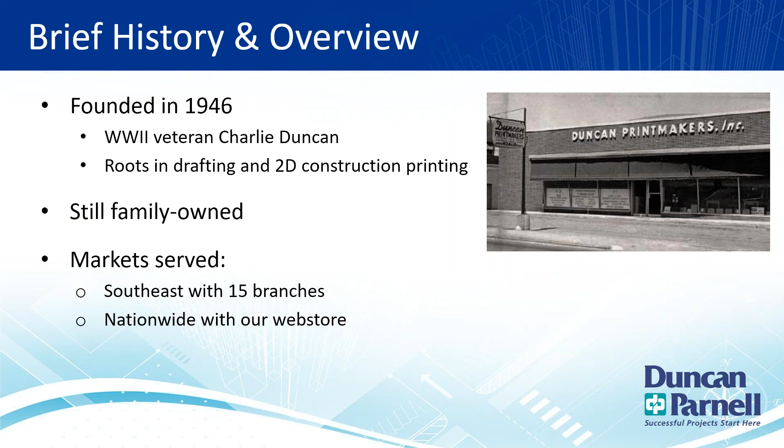Let me get my slideshow going. A brief overview of Duncan-Parnell, who we are and what we do. We were founded back in 1946 by Charlie Duncan after World War II. Started off as a printing company, still a family-owned company. Mark Duncan is the president now, he's third generation. We pretty much cover the whole Southeast along the Atlantic coast from Florida, Georgia, South Carolina, North Carolina, and Virginia for survey products, and we have 15 different stores, also nationwide with our web store.

A few of the things we do, of course you guys are aware of our geospatial solutions or you wouldn't be here at this webinar. We are the Trimble dealer for those states I just mentioned in the geospatial arena, and we also sell, rent, train, and have full service centers to work on all your equipment. Some things you might not know about our company: we do have a big signs and graphics solution center. We can do construction, interior, exterior, ADA, any of that - big signs for construction sites, fence wrap, graphics around buildings. And when we're turnkey, we do everything from consultation all the way to installation, so we can help you out with any of your signs and graphics needs there.

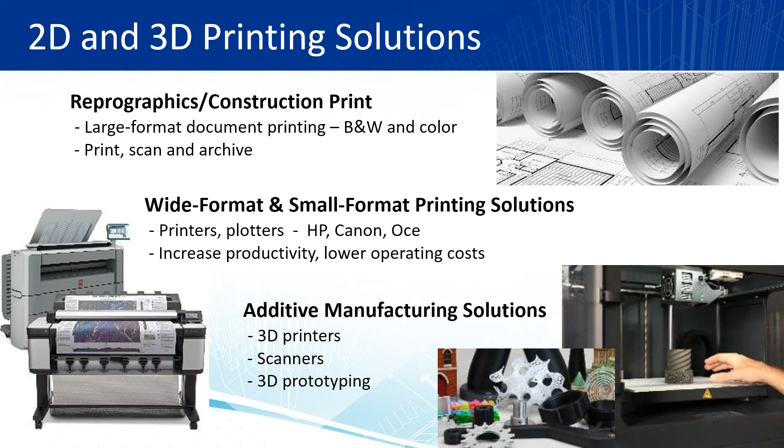We still do reprographics and construction prints. In our 15 offices, we still have a lot of walk-in business and people we do printing for. We also can scan and archive any old documents that you have. We do sell wide format and small format printing solutions, partnered up with HP, Canon, and Oce. And we also have a big additive manufacturing solutions division, which is just a long word for 3D printing. We sell 3D printers, we sell scanners that go along with 3D printers, and we can also scan things that you want prototyped - we have a division that specializes in prototyping there, so we do have that as well.

So a few of the things we're going to cover today: we'll start off with Trimble Access 2020. It came out just a couple weeks ago, and it's now available on Android, so we'll cover how that works. They added a Snap to toolbar in the map screen - Snap to is hard to say, so I'll probably just call it the Snap toolbar - but they added that. They also added a limit box if you're doing SX10 stuff using point clouds. They now support polylines, and you can also stake a slope distance along the line.

That's new. There's also a new feature for measuring points with independent sets of satellites, and you can change your precision display on the data collector. We're going to take a look at all of those in Trimble Access just to show you guys where those things are. Then also, in TBC, we've added a CAD Command Line in version 5.3, and also a feature to flatten surfaces - if you have some outliers on your surfaces, you can automatically flatten that. There are a couple other smaller changes in the software, not as much in TBC 5.30 as the additions in Access, but we'll take a look at those as well.

So with Trimble Access on Android, I've got a few slides on that. I don't have a TDC 600 with me to share with you guys - Access will look a little bit different on the TDC 600, but right now Trimble Access will work with the new version on Android, but it's the Trimble TDC 600 only.

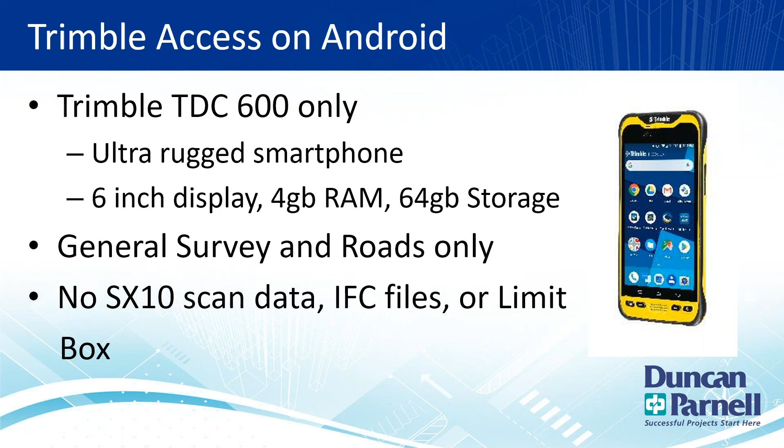Currently, Access for Android only comes with the General Survey and Roads modules. They're working on some of the other modules you can get for Access, and we'll probably be adding those in the future. Right now it can't handle SX10 scan data, due to processor size and memory limitations—phones just don't have the horsepower for that yet. IFC or building model files can't be handled either, nor can limit boxes, since that feature depends on SX10 data. But here's kind of what it looks like.

Slightly different, because now you've got a 6-inch screen. You can lay it over in landscape mode. These screenshots are from portrait mode, obviously, but you can see that the layout's going to be a little different on the 6-inch screen.

I know some people have had concerns about the TSC7 being so large—some guys don't like that. This does open the door for another option, where you can have a smaller data collector that's still rugged and still running the newer version of Trimble Access. The TSC3s we're still selling, but that operating system, Windows Embedded Handheld, is no longer supported by Microsoft. So this gives you a way forward on a platform that's still being developed and supported. A few differences in the screen, but overall the software looks the same.

Now, obviously this screenshot shows it working with GPS. You can also use it with a robot—you'd need the TDL 2.4 gigahertz Bluetooth radio, an external radio not attached to the TDC600. You can run Trimble Access on Android with a TDC600 and still run a robot with that external Bluetooth radio. It's smaller than the radios on the 5600—you could clip it to your belt, or there's a pole mount for it like the 5600, so you can still run this with a robot as well. That covers how it looks on Android.

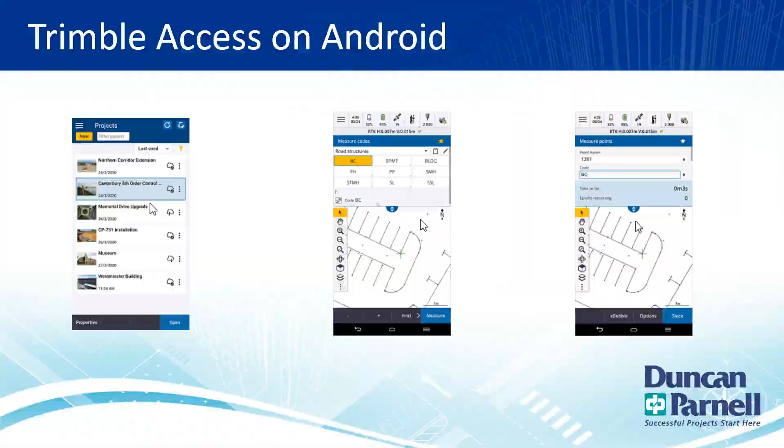So let's jump out of the slideshow and take a look at some of these features in Trimble Access. This is Trimble Access 2020, and I've got a DXF file loaded in the background. For those of you not familiar with background maps, over here on the side I've got my layers—I've got this building foundation. I click it once and it's viewable, click it twice and now it's selectable, so I can actually select things in there, stake them out, and so on.

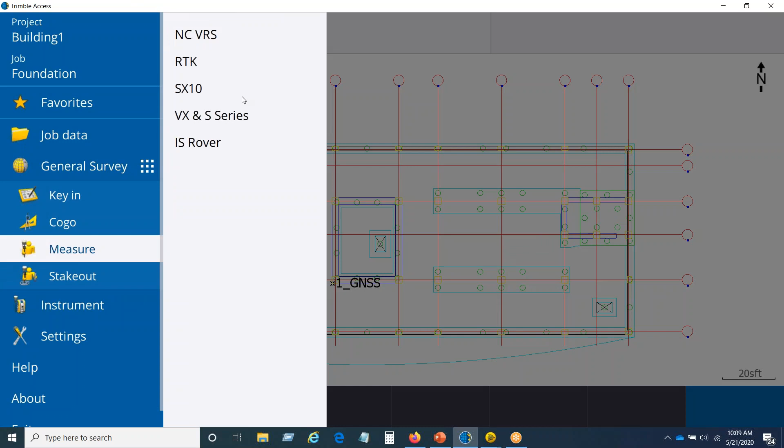I'm going to go ahead and start a survey real quick, since there are some features I want to show you if I'm hooked up to something. I'll go to measure, and actually, let me start with the limit box—that might be easier, since most of the features are based around this map. But let me change projects real quick, to one that's got some scan data in it, so I can show you what the limit box looks like.

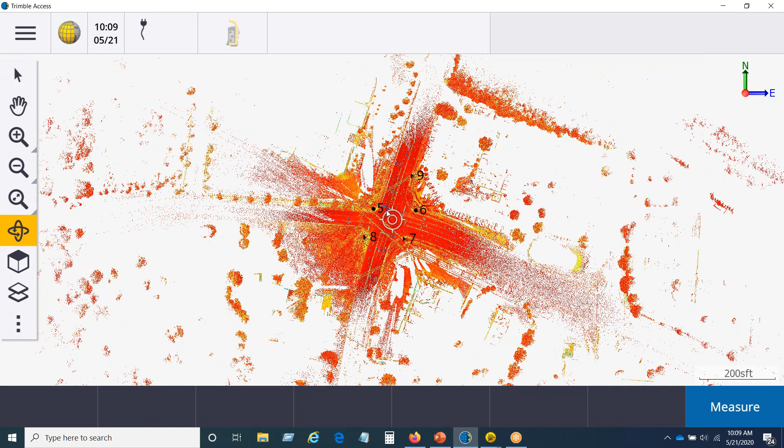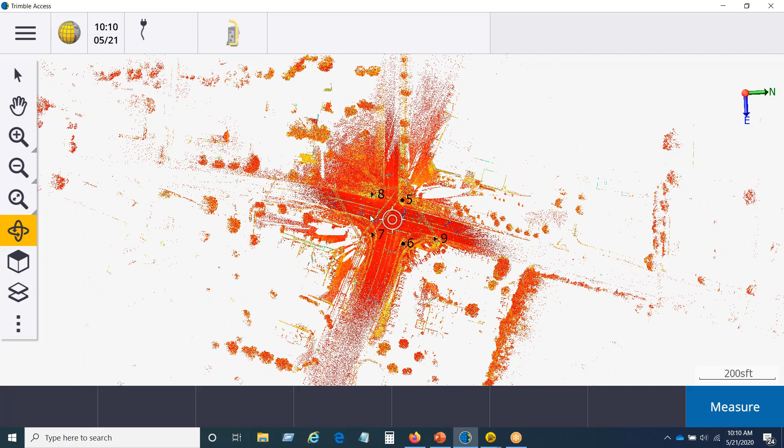So if I turn off my limit box real quick—this is an SX10 scan. The limit box comes in handy for you guys doing scanning with Access, especially with the SX10. This was an intersection one of our customers did up in Hickory, North Carolina. For this project, they were only interested in about 100 feet each way from the center line of the intersection—it wasn't a big project, since they were just putting in some handicap ramps at the intersection. But you can see with the SX10, we get all this scan data in here, and when viewing it on the TSC7, it can get a little much—a little hard to see. So with 2020's limit box, I can come to my menu settings and check the box for limit box.

And let me move my GoToMeeting stuff out of the way.

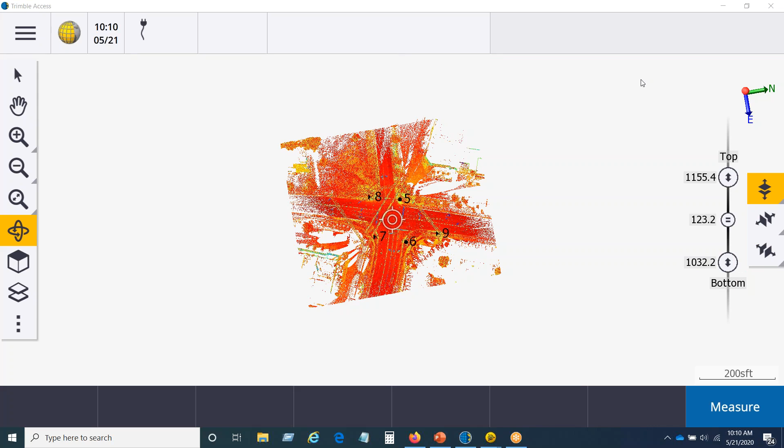Rotate this back to north. I'll just set it to a top view. All right, so now I'm looking northeast and everything.

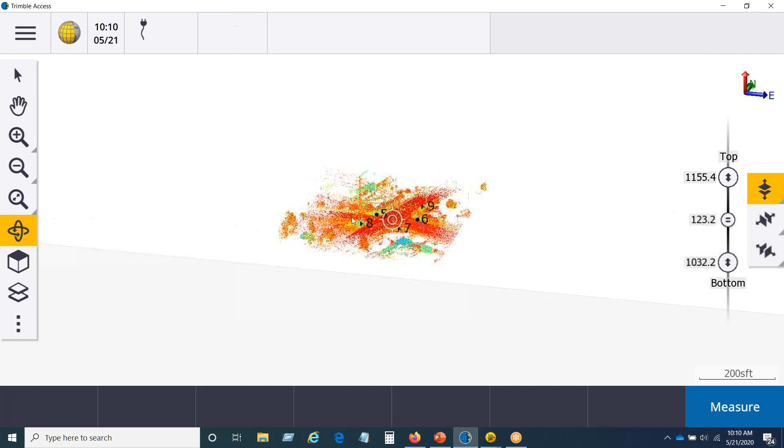The limit box will give you a chance. I don't know if you've ever used the limit box in TBC, but it lets you set a box around your data so you can just see what you want to see. So now when I pan around in this data and zoom in, I'm not seeing all the stuff outside the intersection. I've just set the limits for what I want to see there.

One easy way to do that is if I go up to my menu and look at my point manager, I can see here my northing, easting, and elevation. That gives me an idea for my control points on where this project's located.

Then if I look at my limit box, here we're looking at the elevation. The first box over here is for the top, for the elevation. If I tap and hold on that, I can type in a top elevation, a bottom elevation, how thick I want the slice to be.

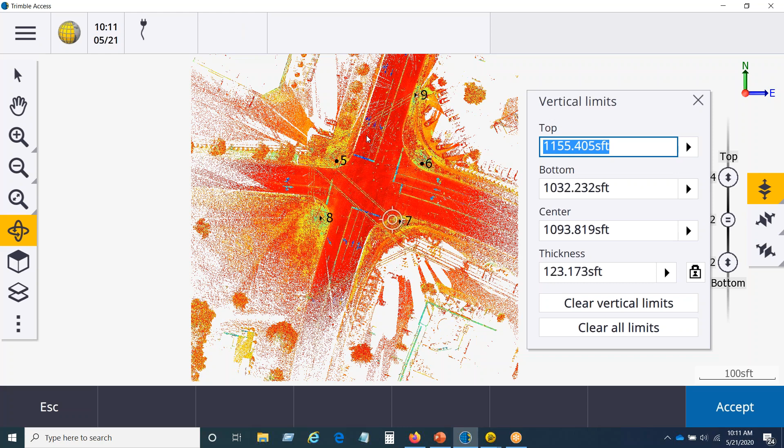That way I'm not just running these bars up and down. I can tell you from experience on a job like this, where you've got data that might show up 1,000 feet away, 1,500 feet away, it can be hard to just get these little sliders to work. But if I look at my points, my elevation, northing and easting, I can set these limits where I need them.

And then with the top button here, go ahead and jump over to a front view. If I look at it from the side there, now with this slider box, I can use the limit box to cut out some of the things that might be in the way.

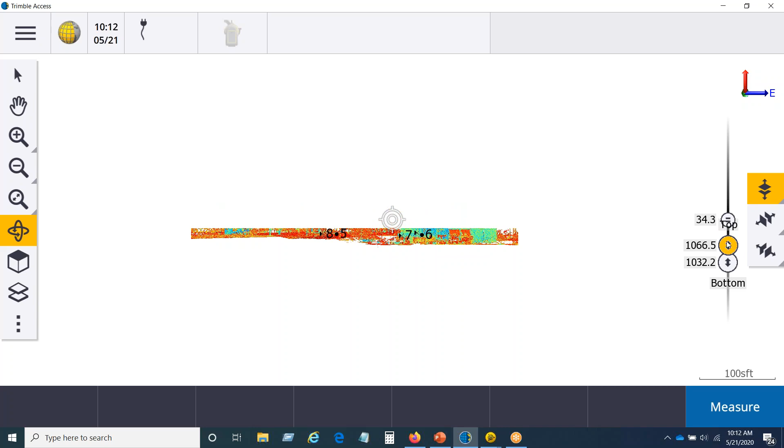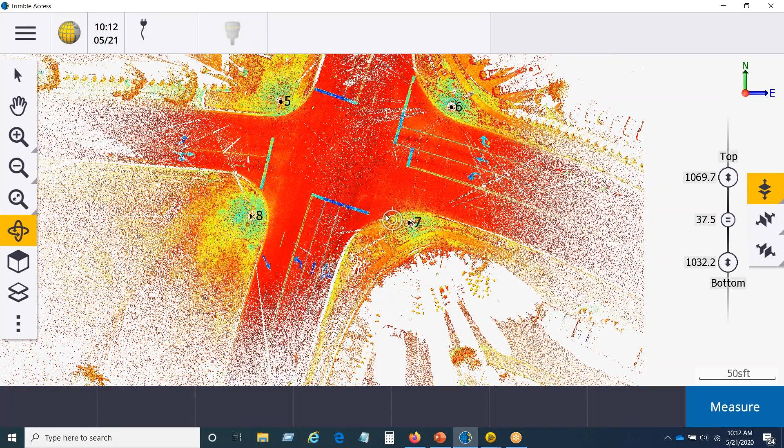Like if I cut it down near the road, now I jump back over to a top view and I look, now I can see my roadway surface as I zoom in without all the power lines and stoplights and all those things in the way.

Or if I'm panning around here, I can just kind of see along the roadway a little bit better without having all that stuff in the way there. And then I can also just move it back up if I want to see the whole scene.

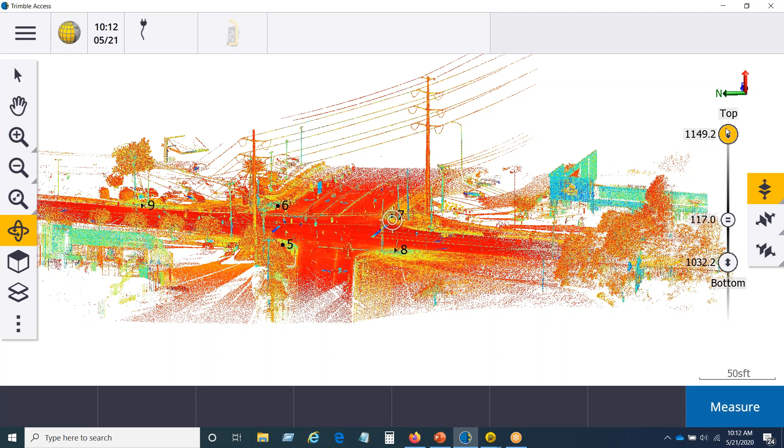And I can do it the other way. I can move the bottom up if I'm interested in just looking at power lines or those sort of things. So that gives you a little flexibility there in how you view everything.

Jump back over to a top view real quick, zoom back out. And then same thing for the left, right, so I can click on that. Left, right, you'll see here, if I look at my point manager, that's running along the easting.

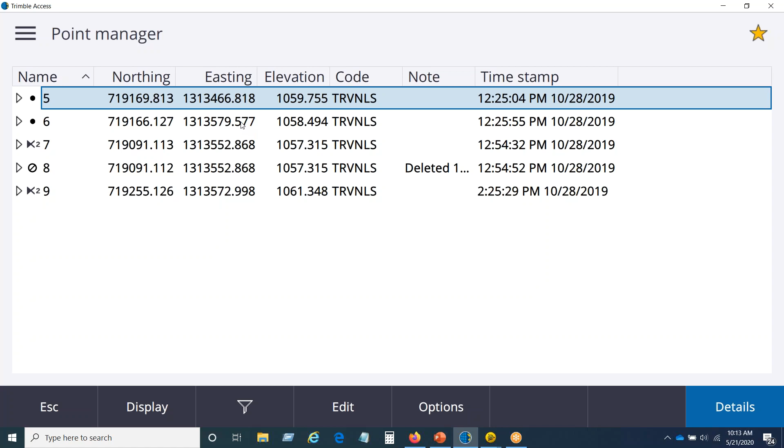So if I get an idea of my easting, and I'll say I want to go 200-300 feet, again, it's just easy to come in here, tap and hold, and adjust these coordinates to get a rough area of what you want there.

And then once I've got that set, I can move this back and forth to zoom in and out on that limit box and get it situated to where I'm seeing what I want to see.

Same thing for the northing. Front, back in this case is going to be your northing. Look at that coordinate, tap and hold on it, key that information in, and now as I slide that back and forth...

...it just gives me an easier way to manage my data on the data collector, so the field crew can see what they want to see without having to look through all that other information that might get in the way, and then they know exactly what they got before they leave the field. So that's the limit box.

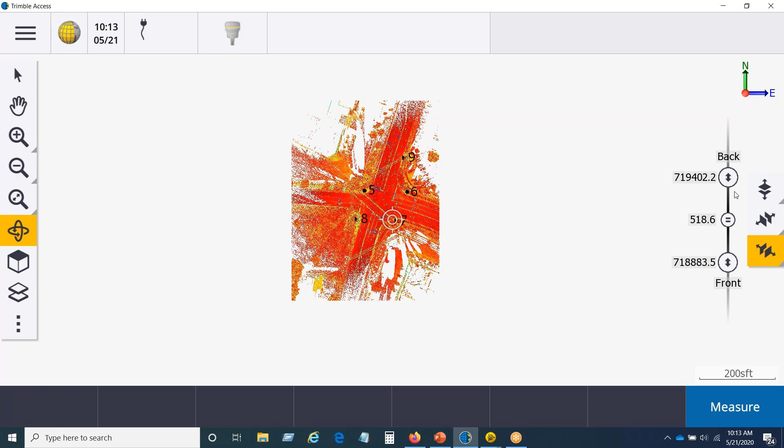I'm going to swap back over, move my GoToMeeting out of the way, swap back over to the foundation job, because the rest of the new features will be easy to see inside this one. So I'll go ahead and open that project up.

Again, like I said, I've got this DXF in here. I do have one point already in the job where I did a quick 1-point GPS calibration just to get my GNSS emulator to line up with the drawing.

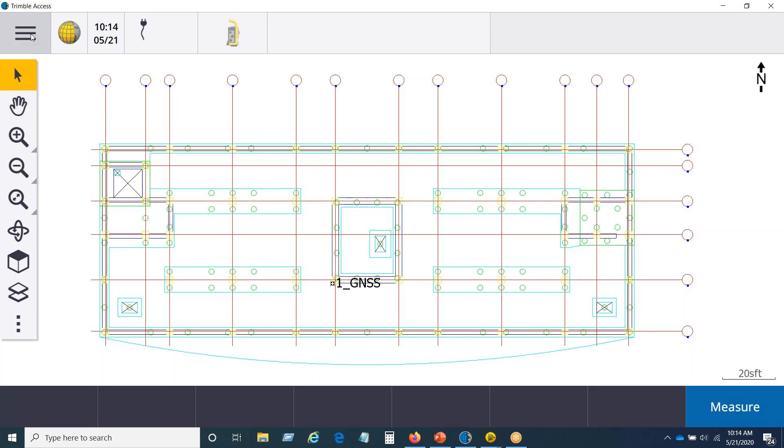And I'll go ahead and start a survey here. Just measure and hook up to the VRS network just so I can kind of fake a little bit of surveying in here.

Oh, whoops, forgot to turn my receiver on. Let me turn that on real quick. All right, get my fake receiver going. Now we'll start a survey up.

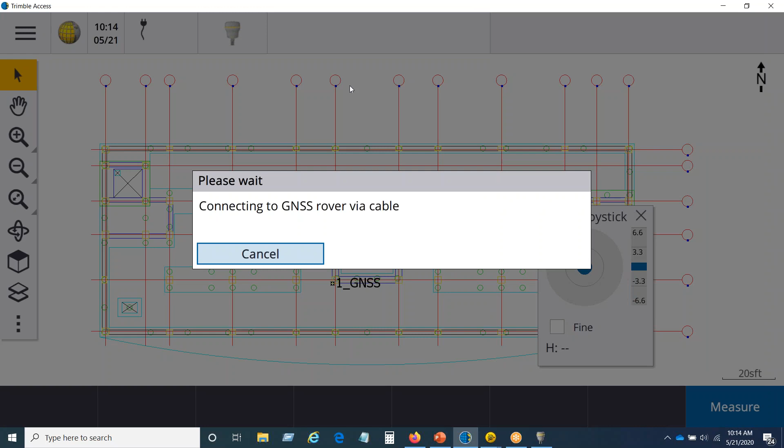Well, there it goes. All right, connecting to receiver. All right, so it's connected up. Let me try that one more time. Start survey. All right, now we're working, I think. There we go, yes.

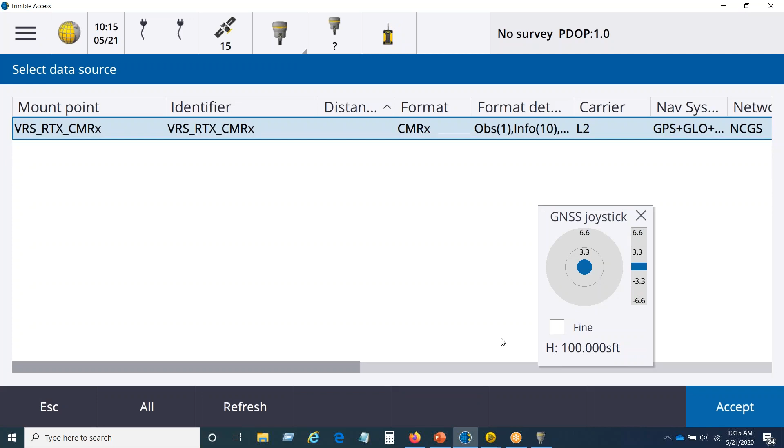All right, I just want to get this on here so that when I hit the stakeout button, it'll actually try to stake something out. So a couple of different things they added. One of the nice things that's been asked for a long time, I'm really glad they added, was down here under the menu, you now have this snap toolbar.

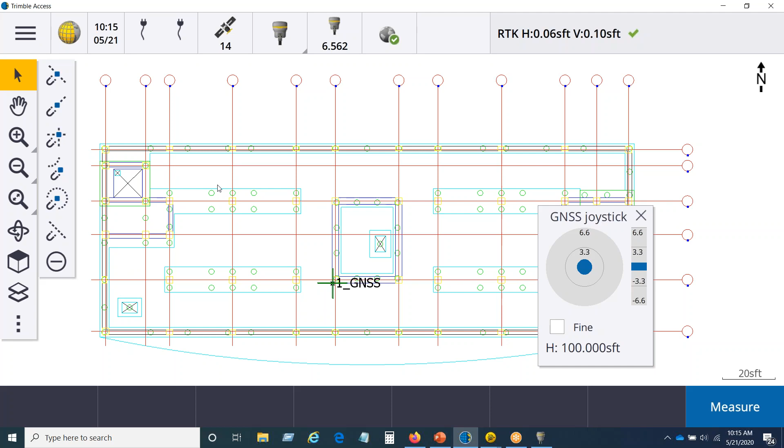So when I go to the snap toolbar, if I'm using a DXF, I can now snap exactly on a point I want and create a point to stake out to, or to do any calculations that I need to do. You could always zoom in the past, zoom in as far as you could and get really close, probably within a hundredth or two, but now with the snap toolbar, I can really get exactly where I need to be.

So when I open the snap toolbar up, you see we have a few different tools. I've got a snap to a midpoint of a line, snap to an end, snap to an intersection, snap to a PI, snap to the center of an arc or a radius. I've got snap anywhere on a line, and then I've got a clear my snaps button down here at the bottom.

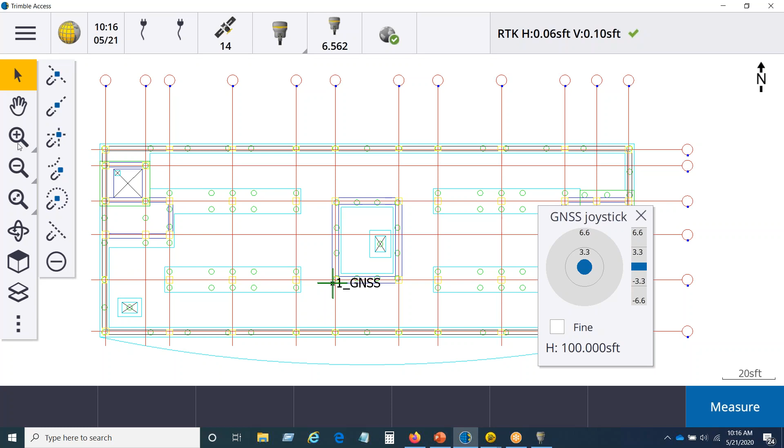All right, so I'll just zoom in a little bit more on this DXF. So I've got a line here. If I just tap on the screen, you'll see I've got a line there. Double tap to deselect that line. If I want to grab the midpoint of that line, I can just choose my tool, tap that line again, and it's going to go ahead and create the midpoint. You'll see that that did not stay highlighted.

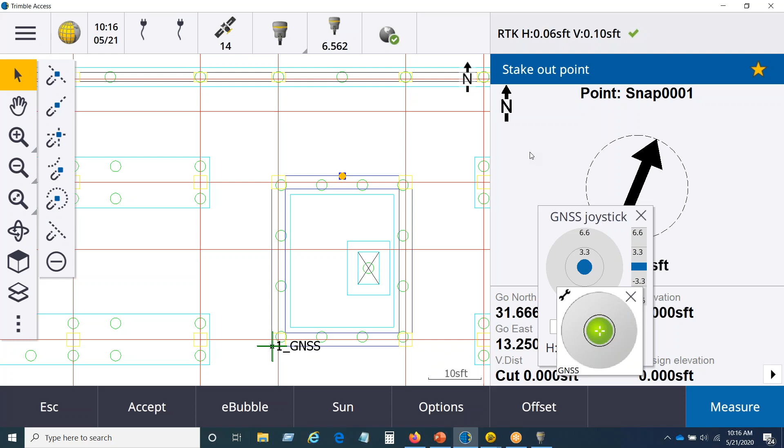So if I want to snap another midpoint, I do have to come over here and tap on my tool again. Now at this point, I've got a node in the job, and I could go ahead and hit stakeout, and you'll see it'll go ahead and stake me out with my GPS unit to that node, right? So I don't have an actual point in there, but I've got a node in there that I can use for stakeout. I'm going to go ahead and escape out of my stakeout screen real quick.

And same thing with the end. Tap here, it's going to do the end. I could stake it out. Intersection, if I choose that, I can tap on the two lines that I want to have an intersection from, and it'll grab that intersection there.

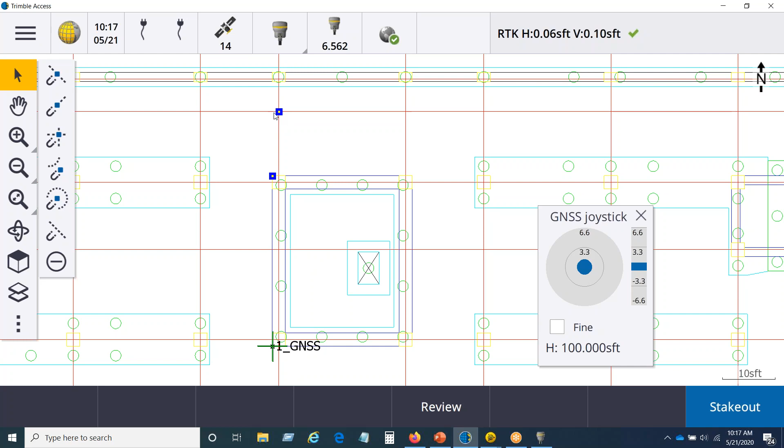Let me zoom out just a little bit. I've got an arc here on the front of the building. If I want to calculate a PI, choose that tool, tap on my arc, and it'll grab a PI. Zoom back in just a little bit, and I've got all these piers, all these little 24-inch piers on the job. If I want a radius point, just click on that curve, and it'll automatically do the radius there.

And then if I just need to create a point along the line, this will go ahead and snap to the line, but it'll snap wherever I tap on the line there. It'll go ahead and create the point. So again, at this point, I've just got nodes in there, and I can stake these out without having points in the job. If I do want to actually create points, I can do it one at a time.

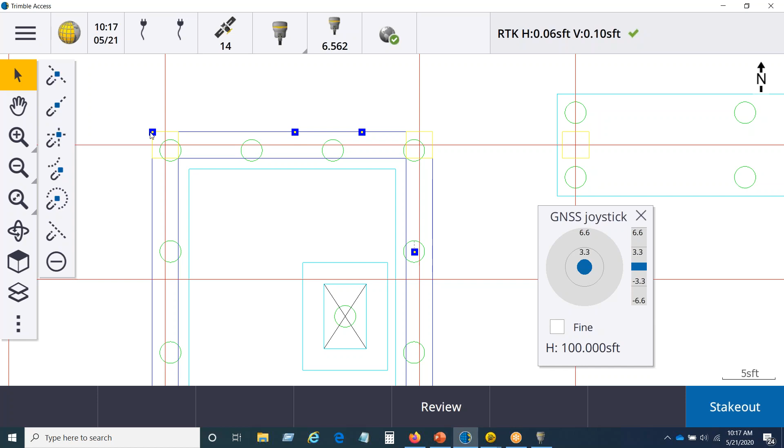Or if I've put a bunch of points in here already, snap the nodes, I can tap and hold on that, create points, start at. Let me start off with 100. Don't think 100 has been used in this job. So 100, I can give it a code if I wanted to, and it'll go ahead, and when I store that, it'll go ahead and create all those points in there.

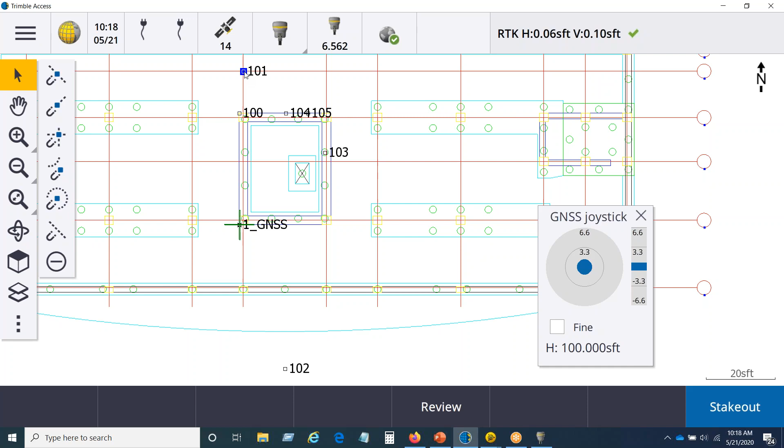So now there's actually points in there. So if you don't want to clutter the drawing up, you can just tap on something in the drawing with the snap tool, go ahead and create a node and stake it out that way. Or at this point, if I wanted to go to 101, I could hit stakeout, and I could stake out over there to point number 101. Or if I needed to do any calculations with it, I could do it that way.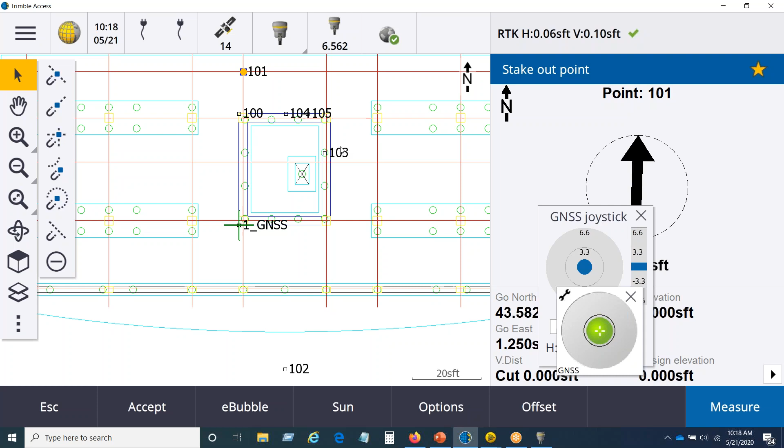So again, this is a feature I've been waiting for a long time for in Trimble Access, and they finally got it in there. So this really makes doing stakeout point-wise or node-wise with DXFs a lot easier. Been using DXF for line layout for a long time, but this really makes it a lot easier for point layout there.

So the next addition is, for a long time, if you went into key in, you'd always have an option for points, lines, arcs, and then there was an option for alignment. They've really just changed alignments and made it into polylines. There is a fundamental difference as well.

The alignments actually created RXL files, which were Trimble routing files, whereas a polyline is just creating a true polyline in the software, not an RXL. So when I go to do polylines now, it used to confuse people a lot. They were like, how do I key in a line, not just between 2 points, but with multiple points? And I'd have to say, oh, that's what an alignment is.

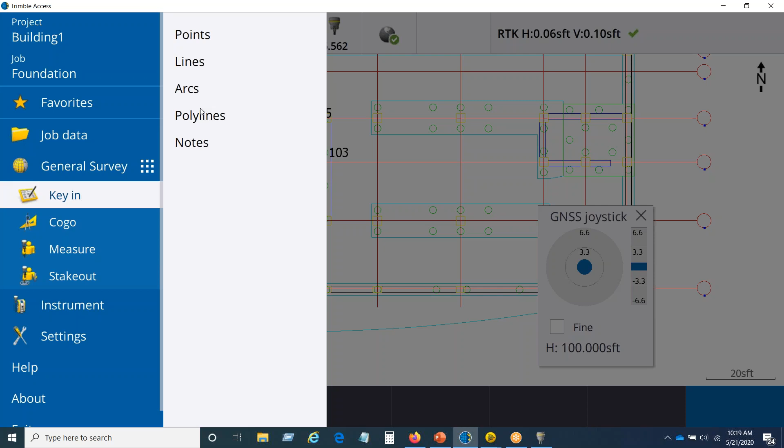It's really just a way to key in a polyline. Now it truly is a polyline. It's not just an RXL you're keying in, but you're actually keying in a polyline. It works the same way though. Let me move this stuff out of the way here.

So when I go to key in a polyline, I can give it a name here. I'll just call this line 1. By default, it's going to go to P-line 001. You can change that in your settings. You can give it a code if you needed to.

Start station, station interval. If you're going to be staking out at an equal distance along the line, let's say you want to create a polyline and set stakes every 25 feet, you could just put in a station interval of 25 feet. Then the software is automatically going to calculate stations every 25 feet, and at any start or end points, PCs, PTs, anything along the line that is a cardinal point, it'll create a station at those. I'll leave that blank right now.

And then for the point range, there's a few different ways you can do this. The easiest way for the field guys to remember is while they're in here, they can tap up here and go to help. It's automatically going to open up the help menu on the data collector for them. You can see to do lines or point to point, it's pretty easy.

If you just want to create a tangent line, you can go 1, 3, 5, and it'll connect those. If you got a series, you can go 1-10 and it'll do all of those. You can combine that method, 1, 3, 5-10.

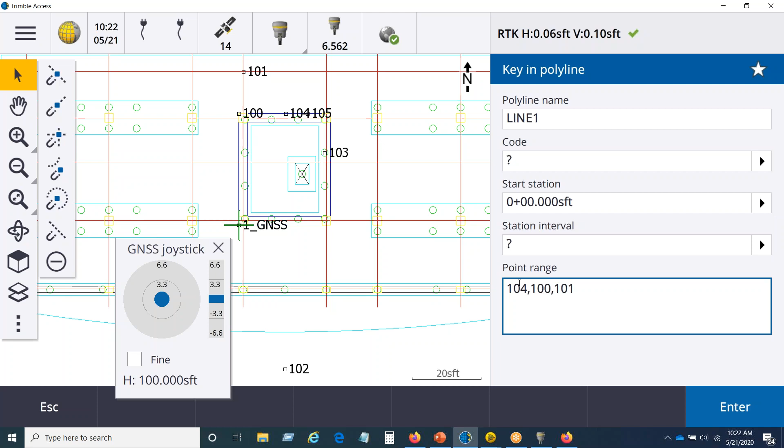So like in this case, let me move this over. I've got 104, 100, and 101. I could just create a quick polyline there. 104, 100, 101. Enter and store that.

And now you'll see, if I turn off my DXF there, accept it. Now you'll see, let me escape there. I've got my polyline there that I just drew in.

So if I tap on that, it'll select it and I can hit the stakeout button, or I can tap and hold. If I wanted to reverse the direction, I can change the direction, basically now 0 for the stationing would be at that end. Tap and hold again, if I wanted to change the direction, now 0 for the stationing would be at that end.

The other thing you can do is offset the polyline. So if I wanted to offset that, maybe this was my property line and I needed to set some stakes a foot off, 2 feet off for a fence line or something like that, I can offset that line horizontally and vertically. I'll just do -2, which would be 2 foot left.

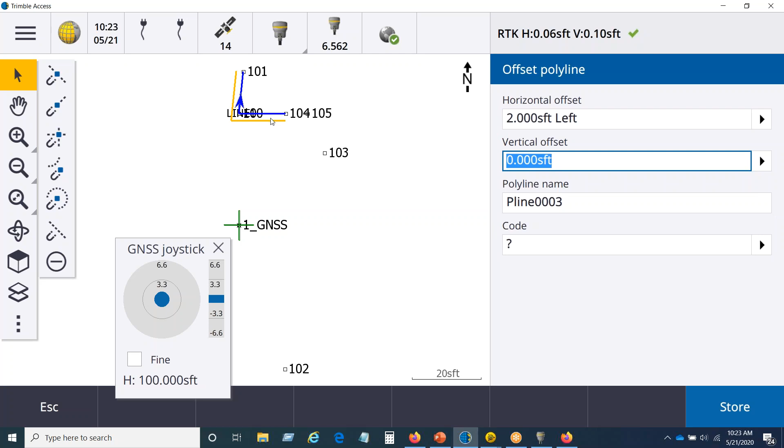Since the line was running this way, I've got another polyline 2 feet off. Store that, and now I can tap that line, tap or double tap to clear both of them. I could tap that line, go to stakeout, and stake out on the offset. So create a polyline, offset it, change directions, all those good things.

You can do it with curves or not. But again, just a handy way now, it makes a little more sense when guys go in there, they see a polyline, they're going to understand it a little bit better than doing it with an alignment.

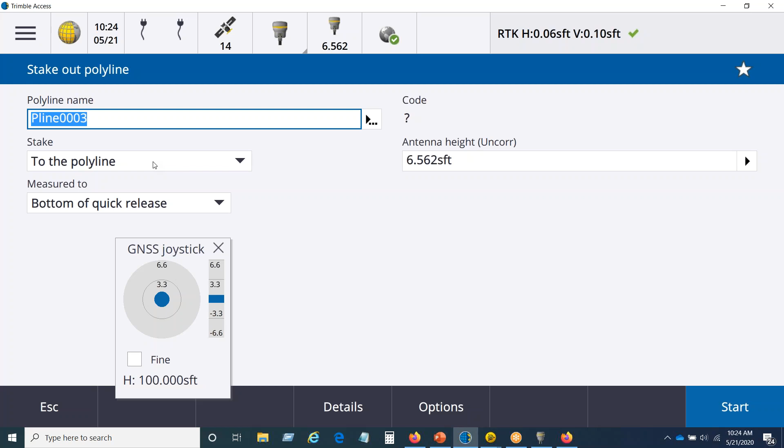So that was polylines. Another feature while we're in the actual stakeout screen, under the stake menu there's an option for any line commands like stake line, stake polyline for a distance along a polyline. What this does is actually allow you to stake a slope distance now.

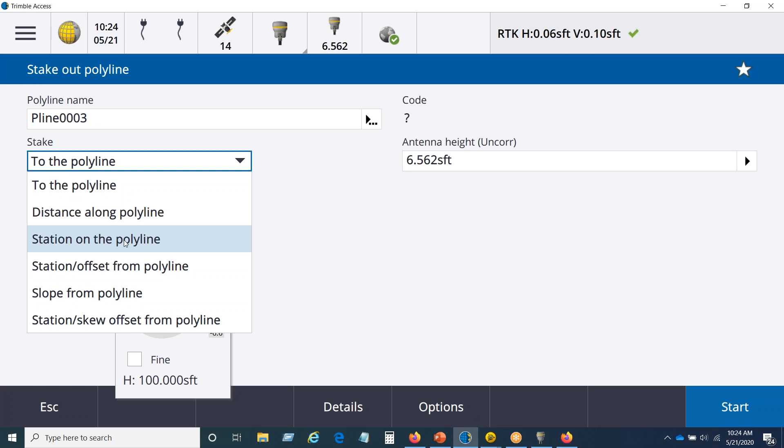Going all the way back to Survey Controller in the TSC1 days, all the way through Survey Controller and Access, anytime we staked out a line, did a station on the line, station offset, whatever, it was always a horizontal distance. It didn't take into account the slope distance at all. So now they've added the distance along a polyline.

So now if you stake that, if you're doing something up a steep slope and you do 25-foot stations, that 25 is going to follow the slope of the line. I have had this pop up over the years a few different times where guys have been like, hey, I'm working on a steep project, or maybe I'm trying to set some stakes up a 3-to-1 slope or a 2-to-1 slope, and I don't want the horizontal - I actually want it along that slope distance. So now anytime you're staking out a line, that option is going to be in there as well.

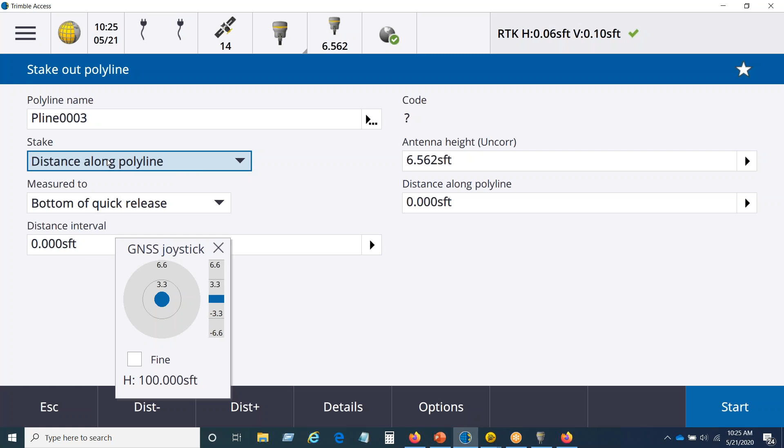So that's the other one there. I'm just going to go ahead and escape there. So polylines, staking distances, double click there to turn that off.

Now, another thing that they've added to 2020 that's kind of neat, still kind of wrapping my head around this a little bit, but it's a cool feature. For a long time, we've told guys, when you're setting control, it's a great idea to go ahead and shoot it once in the morning with your GPS. If you're setting control with GPS, shoot it once in the morning, shoot it once in the afternoon, and then average them together, or maybe even shoot it 3 or 4 times.

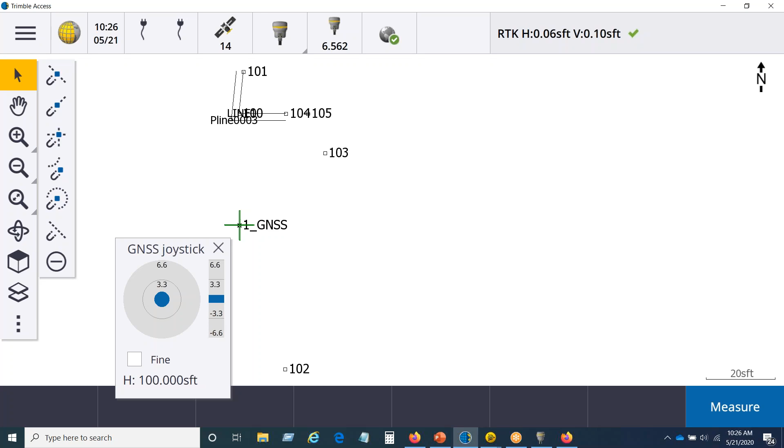But the idea was satellites are always moving. So if I shoot it at 8 o'clock in the morning, wait 4 or 5 hours and shoot it again in the afternoon, now I've got a different set of satellites. So basically I'm getting an independent measurement, right? Because I'm shooting with one set of satellites in the morning, one set in the afternoon.

But now that we have, if I click up here on my satellite screen - right now, because I'm using an emulator, I only have the GPS and the GLONASS satellites. But a lot of our networks out there, or a lot of your receivers, if you're using R10 Model 2 and R12, an SP85, anything like that, and you're using it as a base rover, a lot of the networks nowadays are actually using GPS, GLONASS, Galileo, and some are starting to add Beidou in there too. So a lot of guys are having 20, 23, 24 satellites up on the screen.

So what Access will allow you to do now is actually create a subset. Down here, when I click on my satellite icon, I've got an option right now - all the satellites are being used, but I can create a subset, set A. What it's going to do is look at all these satellites that are in view, and it's going to equally subset them in an equal distribution to keep good PDOP, keep a good number of satellites, to give us the best solution possible.

So if I click on set A here, this is kind of a bad demonstration because since I'm using an emulator, it's actually not going to split them out. But what it'll do on yours, if you've got 20 satellites, it's going to split them into 2 groups of 10 and equally distribute them around.

And I will say I would recommend this only if you're using multiple constellations like GPS, Galileo, and GLONASS, or add Beidou in there too, so that you have more satellites. If you're just using GPS and GLONASS, I split 14 satellites, I'm down to 7 - I may not get the best solution there.

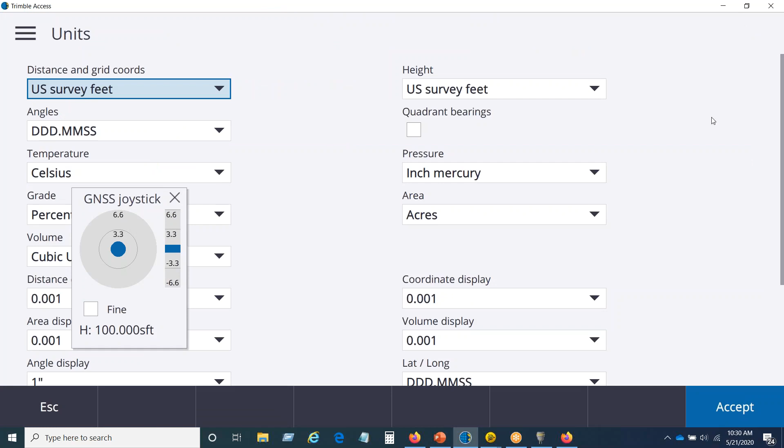The last thing I want to show you that's new in Access is they've added an option for precision display. Mine's actually set at the 95% confidence level right now - I forgot to change it back to default last time I was playing around with this. But if you go to your job settings, job and properties, under units, in the new version, down at the bottom there's an option for precision display. By default that's going to be set to DRMS, the distance RMS value.

That's actually what's being calculated when you're doing a GPS survey. The software is calculating those precisions based on a distance RMS value. DRMS is a 65% confidence level in 2D, and then it just uses a 1 sigma value, or 68% confidence level, in the vertical. So horizontally you're getting 65, vertically you're getting 68. For all intents and purposes, you could say it's a 1 sigma solution that you're seeing on the data collector.

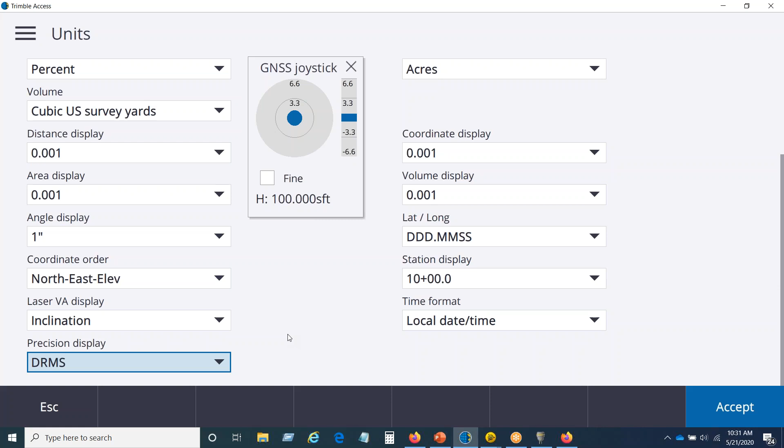Ever since TBC came out, that's kind of driven guys nuts, because the field guys see a 68% confidence level - if I hit accept, accept that again, open that job back up, you'll see 300s by 500s up at the top under my precision. But then the office guy brings that data into TBC, and TBC defaults to 95% confidence level because that's what we do all our least squares adjustments at. That's the number that's pretty standard for most things in the survey world, so TBC defaults to that.

So now the field guy is seeing 300s by 500s, the office guy is seeing 600s by 1000s, and I get that phone call asking why don't the precisions match up? Or if the field guy is seeing 100s by 200s, the office guy is seeing 200s by 400s, and it just causes a little bit of confusion, right?

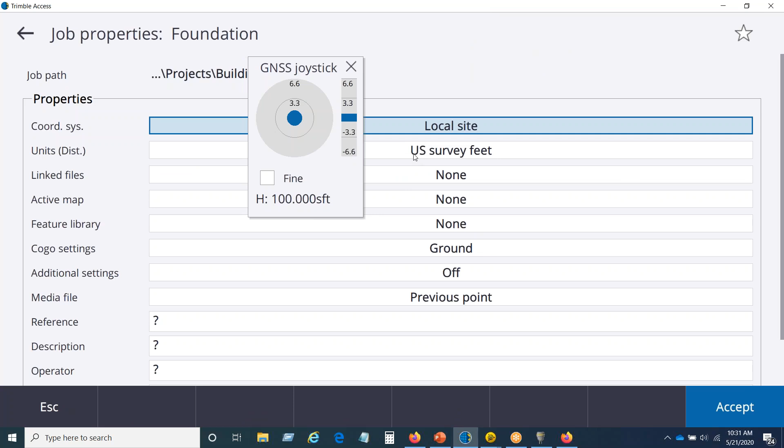So now you can go in here, click on your job, go to the properties of the job under units, and I can set that for either a 1 sigma value - the default being that distance root mean square - a 95% confidence level, or a 99% confidence level. If I want to match up with TBC, I can set it to 95, hit accept, open, and now you'll see the scalar is 1.95. Effectively, that's going to double the values there for the precision estimates, and now the guys in the field are seeing the same thing that the office would.

So you're just kind of making apples and apples, making sure the field and the office are singing off the same sheet in the hymnal.

So those are all the new updates in 2020. There are a few bug fixes and things like that, but that's it for the main updates. We had the Snap-to toolbar, the limit box now has polylines, you can stake out on slope distances, independent subsets for your satellites, and also your precision display there.

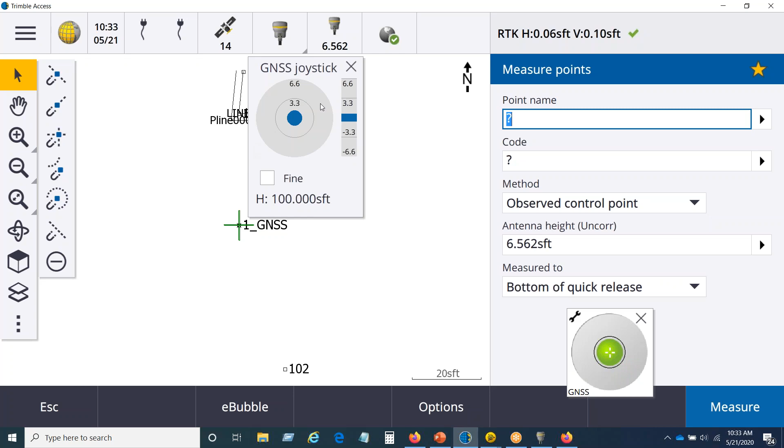Like I said, with TBC there's only a couple of improvements, or a couple of big changes that they put in there, so that won't take as long as Access. But yeah, if anybody has any questions, just shoot something into the chat.

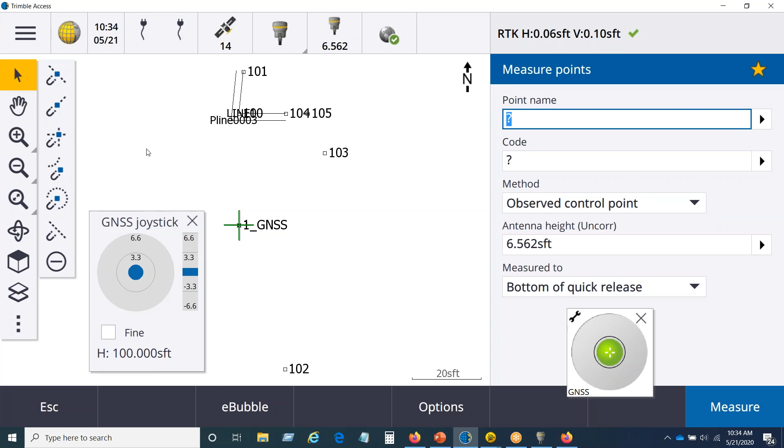All right, well, I'm going to go up here and end my survey real quick. And then I'll just go ahead and minimize Access. I'll keep it open just in case you need to come back and take a look at it there. Close my joystick. All right, so let's take a look at TBC.

So I've got two different jobs in TBC. The first project here is to kind of go over the CAD command line. There's not a whole lot of differences in TBC 5.30, but the CAD command line is something Trimble's been working on for a long time and actually took a lot of development to come up with. It's a pretty big addition for this version, as far as the amount of work that had to go into it.

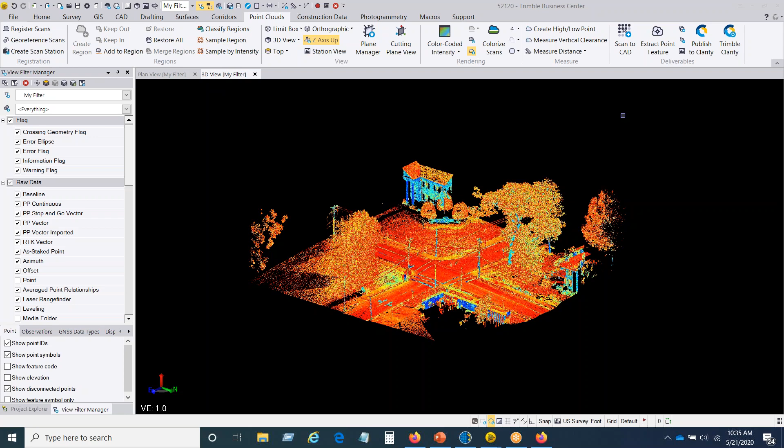So for years, that's something some people have been asking for. I chose some SX10 data here. This was an intersection job because a lot of times what guys are doing CAD-wise in TBC is related to point clouds, right? You've got to extract some points, extract some line work, whatever, out of TBC. And in the past, we had to go to CAD. If we wanted to create a line string, click on Create Line String, give it a name, and go through two or three different menus to actually make anything work there. Same thing with a point, to create a point.

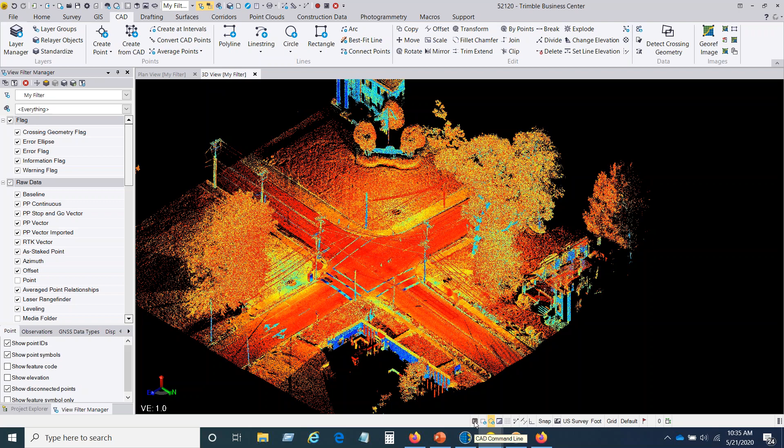But now they've added the CAD command line. For you guys that have used CAD for a long time — I am not a CAD guy, I don't come from a CAD background, so I don't have all the shortcuts memorized — but a lot of them are pretty standard CAD commands. Down here at the bottom, I've got a CAD command line icon. I can click on that, and that's going to open my command line up. And if I don't know the commands, I can just type in a question mark and hit enter, and all my CAD commands are going to pop up here on the screen, so all my little shortcut keys will pop up.

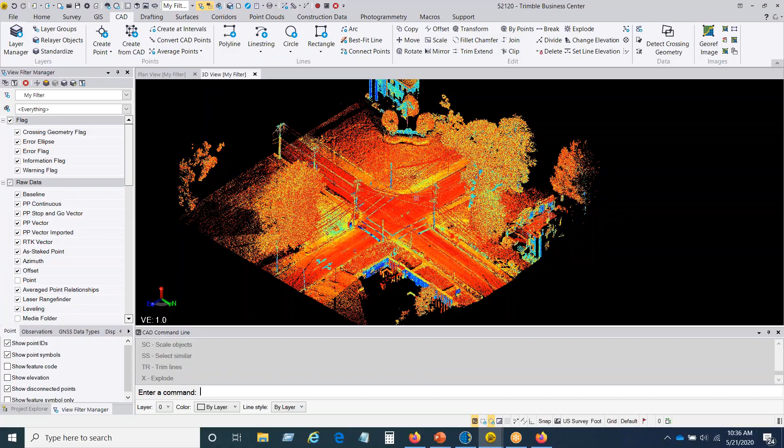All right, first thing I'll do is draw something quick, just to show you guys how it works, and you can play around with it a little bit too. If I want to create a line in here, I've got this split up to where I've got basically a top point cloud and a bottom point cloud. I'm going to go into my view filter manager and turn off the SITE, so all I have is the ground. That way, if I'm drawing lines along the curb or anything, the power lines aren't going to get in the way. But I'll just show you how to create a quick line and a quick point in here as well.

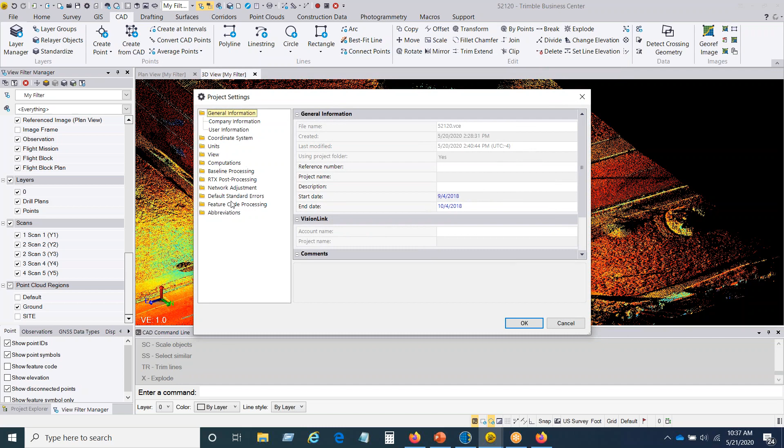One other thing I want to do is load up a feature library. I'm just going to use the global features that comes with TBC here, but if you have your own feature library, you can just drag and drop it in here or load it through the project settings. And that way, as you create points, it will go ahead and put the symbology on there as well.

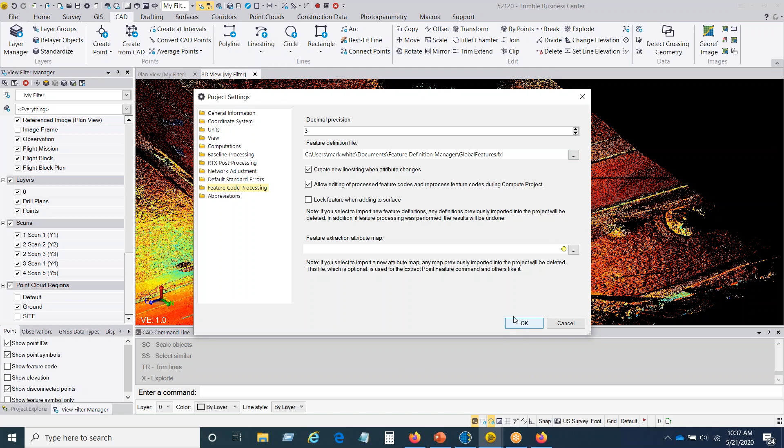Click on OK there. So it's importing that file real quick. All right, so now I've got that file in there.

To create a command or create a line using the command line, I can click on L, and that's the create line string. Again, if you need to know those, they're right up here. But I can go ahead and create a line string. So here, there's a couple options to set.

Right now, auto advance elevation is not yellow, so that's not turned on. Basically, auto advance, as I click on a point, the point cloud, it's going to grab that horizontally, but it's going to make me specify the elevation. So I have to hit enter to accept that elevation, or I key in an elevation I want.

So if you want to just grab the northing, easting, and elevation at one time, you can just click on that. Once it's yellow, now that's turned on, and it's just going to go ahead and grab a northing, easting, and elevation. The reason they have that in there is a lot of times guys are wanting to grab

a line at one level, but they want a different elevation, or create a point at one northing and easting, but they want to use a different elevation for it. So you can specify by northing and easting, and then you can specify a vertical if you have that turned off.

So then also you see down here, we've got a chance to put in different layers here. Now, if you guys have your own layers already from CAD, just take a DWG that has the layers in there that is blank, doesn't have any data in there, drag and drop it into TBC, and you'll get all your layers over here on the side.

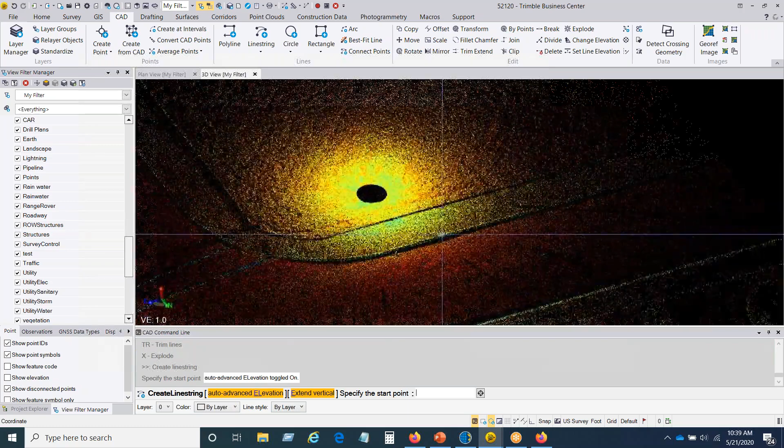So I'll just kind of zoom in here, and I'll just do a quick back of curb line, do a little bit of a straight line, do a little bit of a curve line in here. So specify the start point. I can just zoom in just a little bit here, and I'll just click right here to grab a start point. And you'll see it automatically set the point because I had the elevation in there.

Down here at the bottom now, I've got the choice to do a line or an arc. I'm going to stay on line for a minute. Straight or deflection angle will stay on straight. And I'll grab another point along the back of the curb. Come over here to my PC and click that. Now I've got that line running straight.

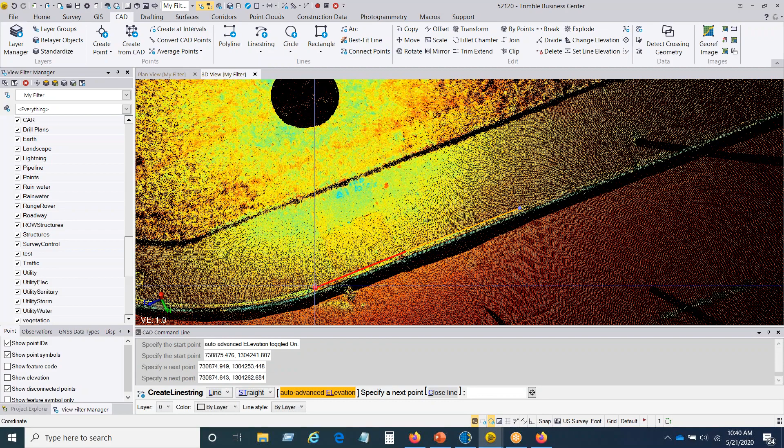Then I can change it over to an arc. Then I get the choice on doing a tangent arc, smooth curve, best fit, or just an arc. I'll do a smooth curve here.

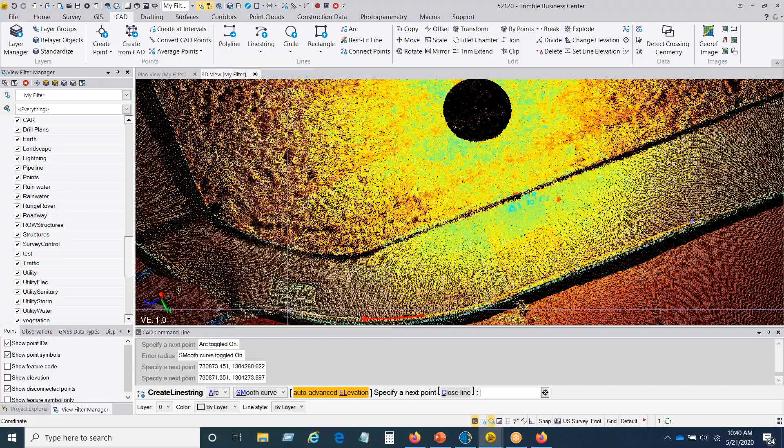And let me come around here, and I'll just click a couple of points coming around here. And just go right along the back of the curb, coming along till it straightens out and gets to my PT over here. Then I'll just switch it back to a line there and go ahead and grab one more point down the back of the curb, hit the escape button.

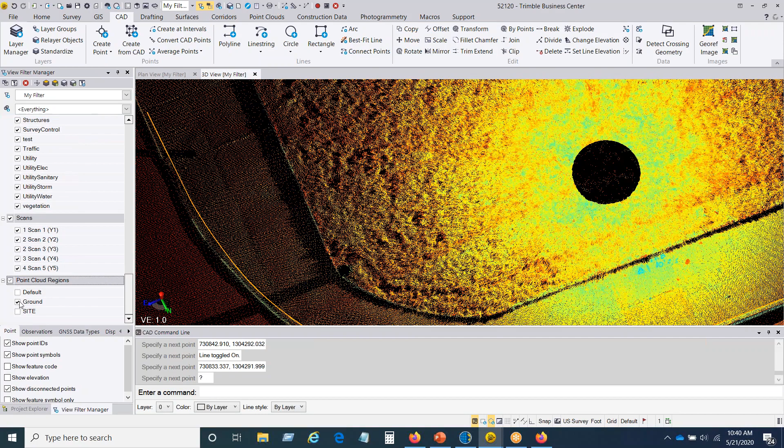And now if I turn off my point cloud there, you'll see I've got my 3D polyline drawn in there. So again, that's just real quick using the command. Instead of having to go up there to CAD, create line string and everything, I can stay right in my point cloud box so I can manipulate the data as I need to, open up my command line, type in L, and start going there.

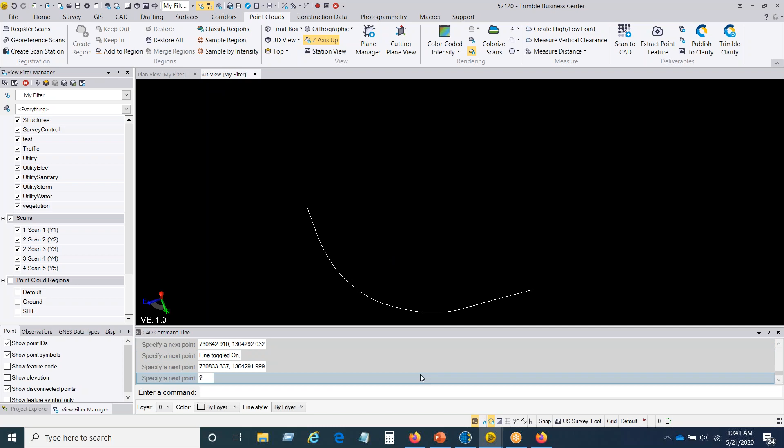So let me turn the site back on. I'll leave the ground off, but I'll turn the site on.

Here's a street sign. PO is the create point command, so I can create a point. I'll enter 100 for the number there. And with that feature code library, SP is my signpost, so I can type that in there. Again, I can set it to the right layer, color, all that good stuff.

I can do a grid point, store it as northing and easting, basically local coordinates, or lat lon global coordinates. I can set it over to survey quality. TBC works in a hierarchy of control, survey, mapping, and unknown. By default that's on unknown. I could set that over to survey if I want it higher on the hierarchy, or if I'm creating control points for some reason, I could set it to control. I could also check enabled or disabled.

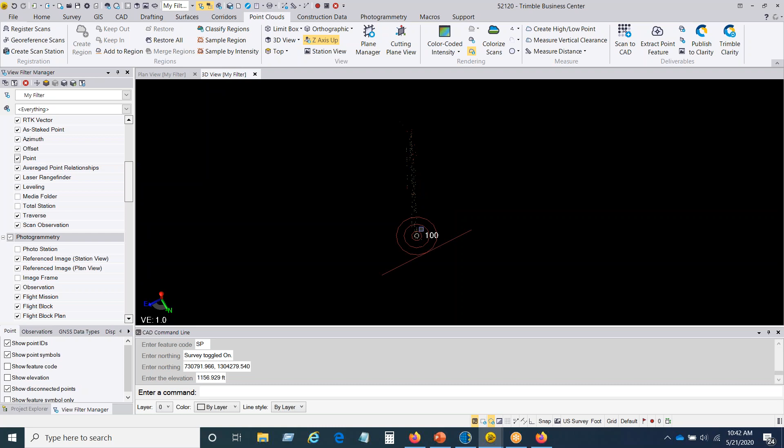Once I've got that, I can zoom in here on my signpost and grab a point there. I didn't have elevation auto on, I didn't click that, so then I hit enter and it'll go ahead and create that point. Now I don't have my points turned on in my view filter manager, but once I turn those on, you'll see because I had a feature library on there, it created the point and automatically created the symbol from my feature library.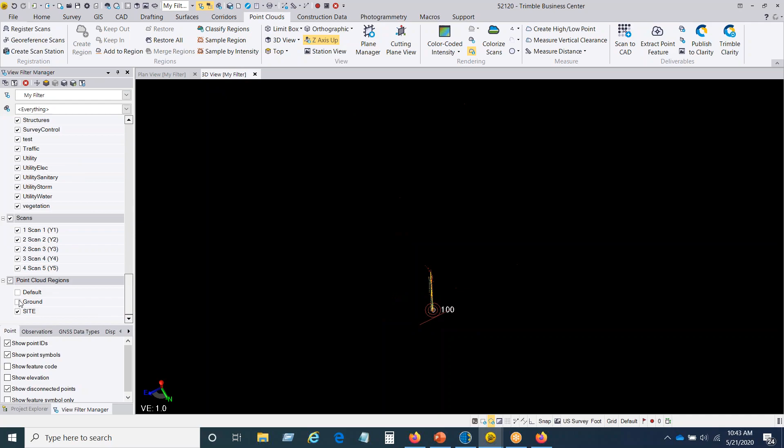So that's the CAD command line, just real quick going through there, turn it on and off down here at the bottom. It just makes things a little bit handier, a little bit easier when you're trying to draw points and lines out of your point clouds. Just a quick overview on that. Play around with it, and if you have any questions, just let me know.

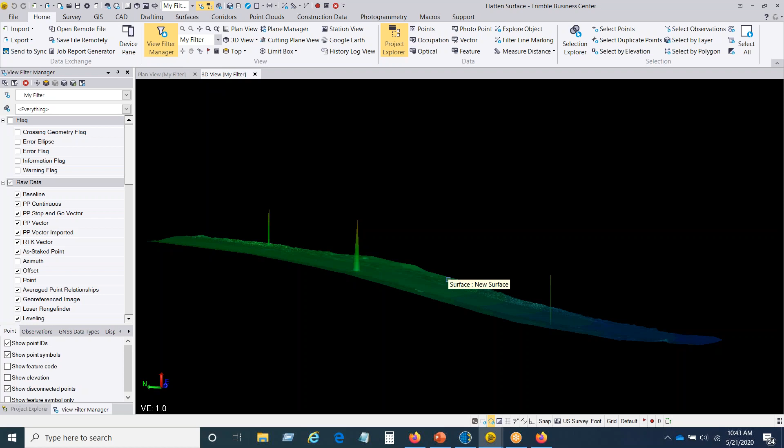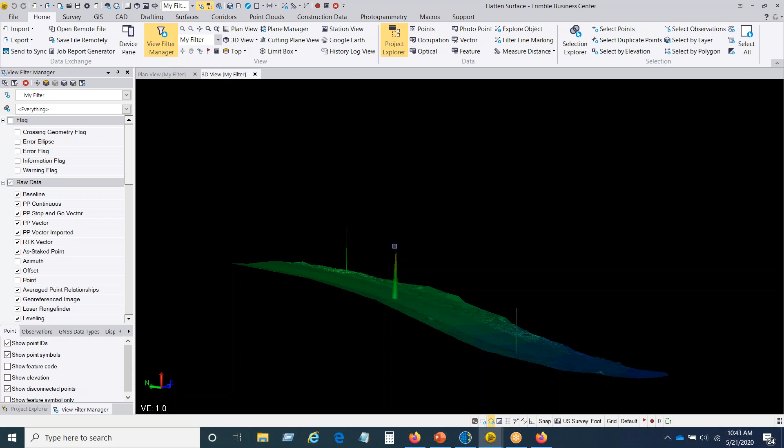But then to finish things up, they did add this flatten surface feature, a new feature inside TBC. A lot of times if you're dealing with point cloud data, whether it's from the SX10 or drone data, even after you extract the ground there might be some fragments from a tree. You can see here there's some spikes where maybe some leaves from a tree, or this piece of the road after filtering things out, or the data you get from a customer has some remnants in it, maybe some tree leaves up at the top.

Or I think this was a piece of a power line or something like that. I could go into my point cloud and clean that up, but once I run my surface, if I see some anomalies in there, now under the surface tab they've added this flatten surface routine. What I can do there... hopefully my computer's not going to blow up, the fan's starting to run pretty hot. But it's going to look at the surface.

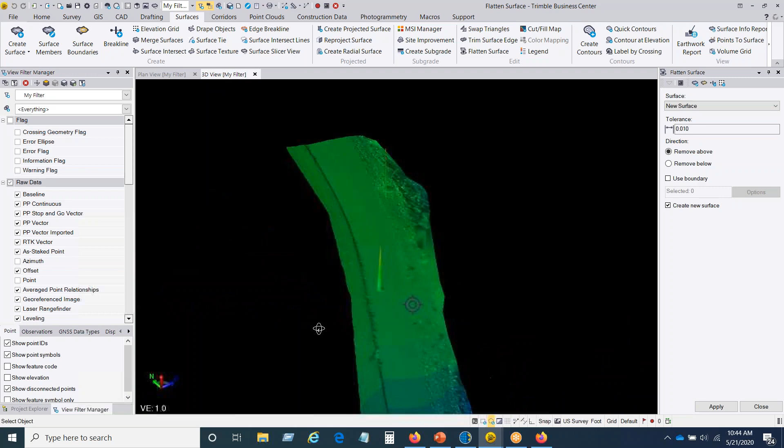You can choose whichever surface, I just got one in there called new surface. You can set a tolerance, basically it's looking for outliers over a certain amount. I've got it set to 1/100th of a foot. If you don't want it looking that close, you could set that out to 2/10, 3/10, half a foot, whatever. But if you've got scan data, one thing you notice a lot on a road is surfaces are going to be a little bit rough along a road where maybe you had some gravel or different trash on the road, things like that.

So that can help smooth things out a little bit if you set your tolerance low. But then you can set it to remove anomalies above the surface or below the surface. You can also use a boundary, just use your CAD commands, draw a rectangle, and select that as your boundary, and that way it'll only work on the surface inside that boundary.

It won't try to take out everything on the entire surface, so that can be handy as well. You can also choose to create a new surface or just have one surface. If you create a new surface, it's kind of nice because it'll leave the original surface and just create a new flattened surface, named something like new surface_flatten. That way you still have your original surface, so if you don't like what it did, you can always delete the other one. The other thing is you can use this as an iterative process.

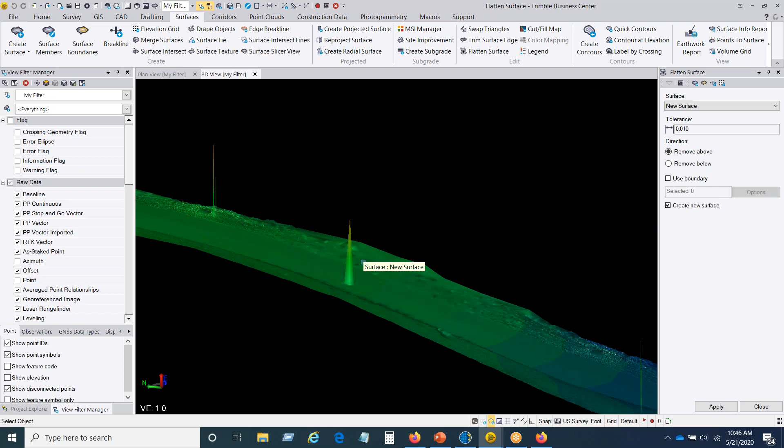So if you run it once and it doesn't take all of it out, you can select that new surface you just created, run it again, and maybe run it 2 or 3 times to actually get it to flatten out the way you want it. So that's another reason why it's good to create a new surface.

Once I have it set up, I'll just hit the apply button, and you'll see it's going to start looking through it there. It'll take just a second to go through the surface. Doesn't take too long, depending on how big your surface is. It might take a little bit longer.

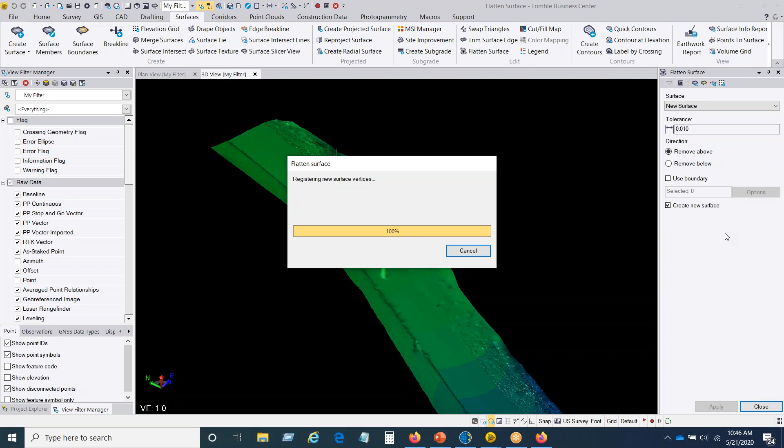Then it's going to go ahead and create that new surface, flatten. You see how it actually highlights that under here in case you want to run it again. And it tells me that 106,622 vertices were removed, and that's because I had it at 1/100 of a foot.

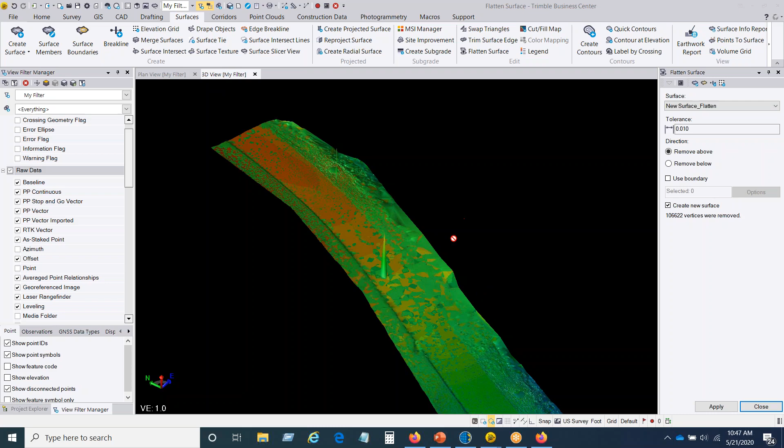You can see where it flattened out a lot of stuff out there in the road. This was SX10 data, so some of these triangles were 1/4 inch triangles, which is pretty tight anyway. And you look at it and think, well hey Mark, it didn't work, it didn't remove anything. Right now both surfaces are on.

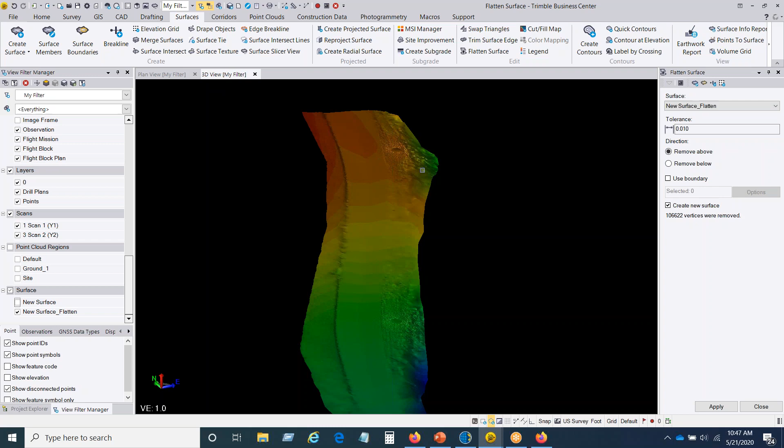So if I turn off the new surface, you'll see now I have the new surface flatten, where it has smoothed the surface out. It's taken out those anomalies and everything. Like I said, if it didn't take them all out, you can just highlight the new surface, run it again, maybe add a border to a certain area, and run it 2, 3, 4 times to get it to flatten out the way you want it to.

But those are the two big things they've added to TBC. A couple of little things that I noticed with 5.30.

If you do a lot of point cloud work, under regions, they took out the classify ground region. So I don't get the option to extract ground directly. I can still do it, but now I have to go to classify regions and uncheck the other things and just run the ground to get the ground out. They used to have a little tab in there that I used all the time called extract ground, where you could just grab the ground out of it.

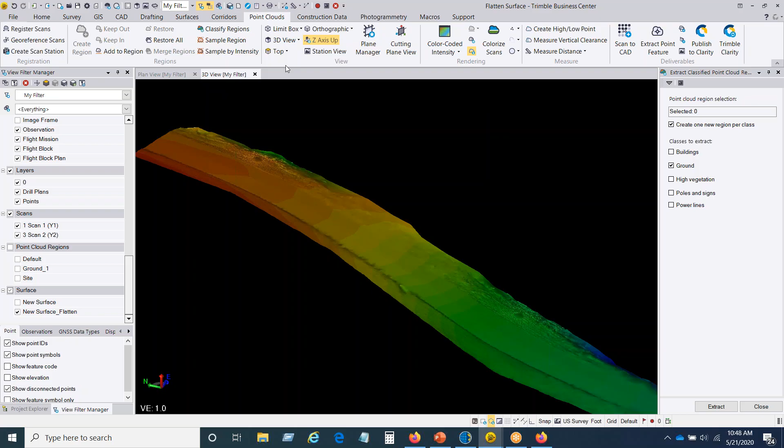That's how in this project I was able to really quickly separate, basically pull the top off the bottom, by creating the ground. So if you update and you're looking for that, it's under classify regions now. You don't have a separate tool.

The other thing is under file and options, and this is a small thing, but it bugged me. Under file and options, you used to be able to set it to a traditional view or a gray view. They got rid of traditional, so now basically the ribbon is going to be all gray with a few colors in it, but you can't set it back to look like the older version. So if you're like me and you always like to go back to what you were familiar with, they took that out as well.

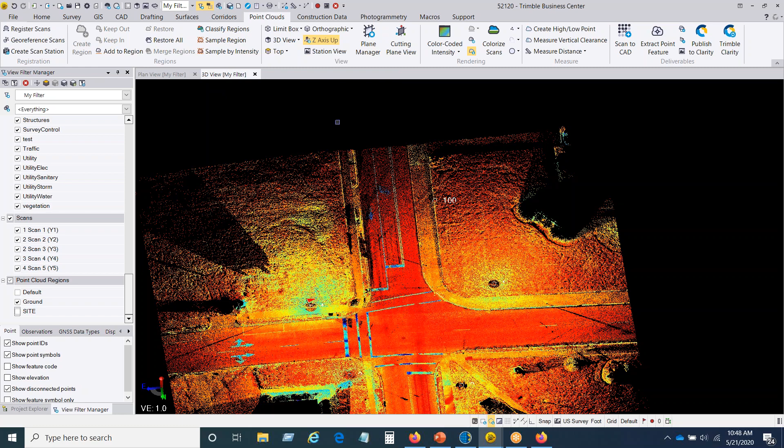But those are the two big things in TBC: Command Line and Flatten Surface. There's some other things inside tunneling that were added, but I don't really have any customers doing tunneling, so we won't cover those today. But yeah, that's pretty much all we had on the new things in Access and TBC.